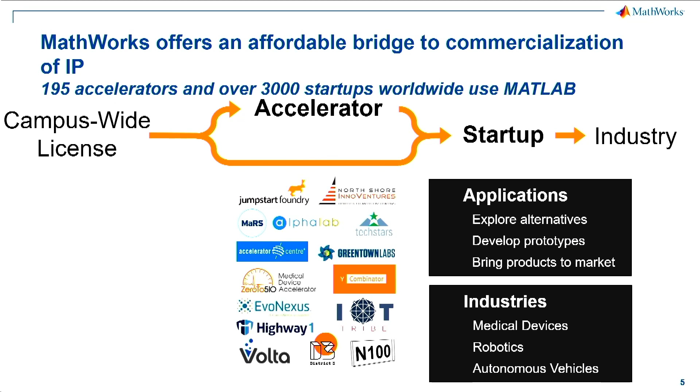I will just run through these slides; the main content I will be showing you all later. So, benefits of startups - you all know these, like 1 year free access to Matlab and Simulink you will be getting, more than 90 add-on products. Currently we have 120 toolboxes present in Matlab. Then we have up to 10 licenses per company also. We have technical support - application engineers and senior trainers like me will come to train you all with different tools like Matlab, Simulink, Stateflow, on a particular topic or domain if you have one.

Then, there used to be 50% off earlier, but now we have free additional online self-paced courses, which I'll show you all as well. If anybody is new to Matlab or wants to learn Matlab from the beginning, you don't need to pay for other training centers. You can go with the Matlab website itself.

We have some of the fastest growing companies, like Alphabet, Apple, and others using Matlab software for control design algorithms and more. We have two major products - one is Simulink and one is Matlab. Matlab is for scripting, where you code just as you do in C and C++. Simulink is a visualization, model-based algorithm development tool where you have blocks of different things, which you join, modify, and use. I'll show you one or two demonstrations of how we work in Simulink and Matlab.

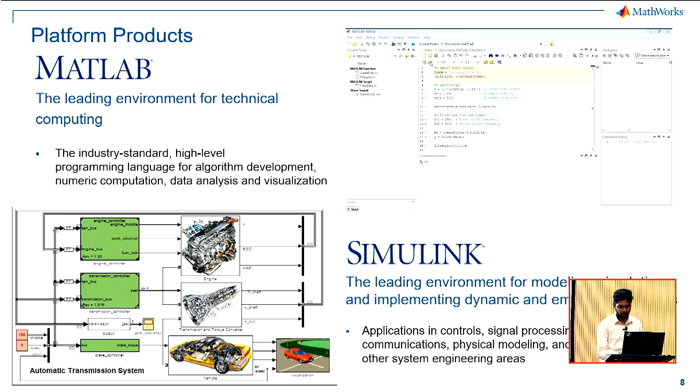Why is a campus-wide license important? When an institution gets a campus-wide license, every student can access it with full resources just by using the college main ID. So it becomes an impact on the whole college. Whenever it's required, they can utilize it, unlike before when they had to approach somebody to get the license for their research and other purposes.

With MATLAB, you can go for learn-to-code or code-to-learn, both alternatively. When it comes to introducing it in the curriculum, we have figured out various areas for implementation. In mathematics, colleges like Kalasalingam University and others have already implemented it, with first and second year students having mathematics laboratories using MATLAB for M1, M2, M3, M4, apart from their academics in laboratory sessions. For electrical, analog electronics and all use MATLAB software. For electronics and communication, we have wireless communication, signal processing, and other things using MATLAB. Robotics also uses it for control algorithms and designs. This is how we trace it for individual departments to add it into their curriculum.

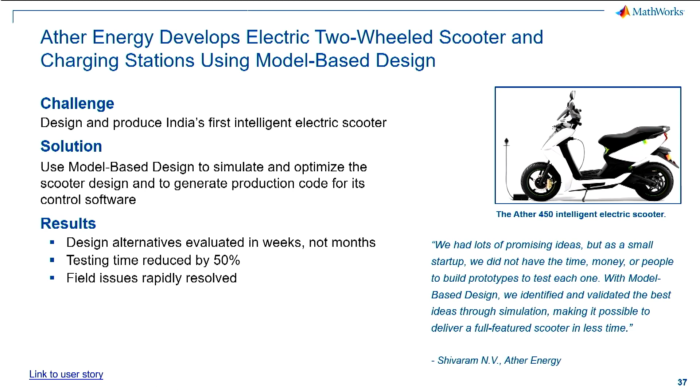Ather is one of the first leading intelligent scooters, which we can say was designed using MATLAB. They got the result too, completely developed and designed using MATLAB.

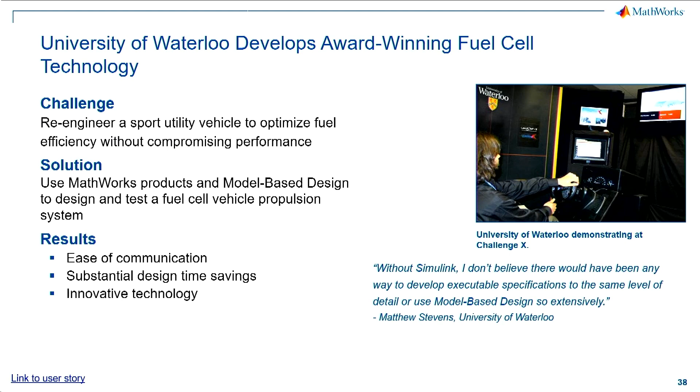Then we have University of Waterloo, who developed a fuel cell based electric vehicle. It is a leading project nowadays in electrical engineering or electric vehicles domain, we can say. They developed it already and tested everything using MATLAB.

So you can see where the software is right now, and you all have the opportunity to start learning using the pre-requisite courses we have, self-paced courses, free using your college domain mail IDs. Start it, learn it, and you can also be placed as a scientist in ISRO too. So this is all about MATLAB - these are the small slides I had.

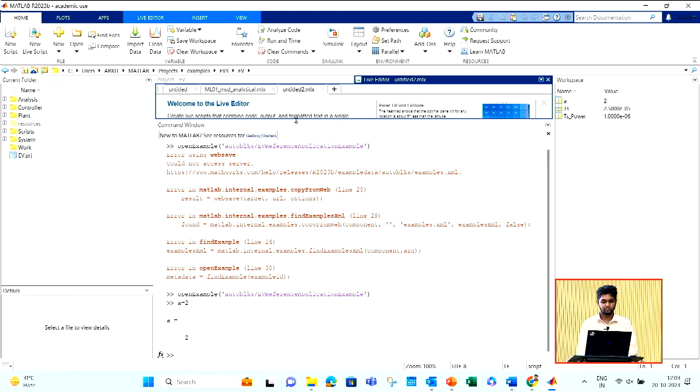Then an additional thing we have is new live script. Everything whatever you do will be printed on the right hand side then and there once you run it. No need to type, compile everything and then get to know the answer. At one particular point, if you want to know the solution or what values or output you are getting, you can know it then and there like this.

So if I run it, on the right hand side it will print me the values. Let me zoom it in, okay.

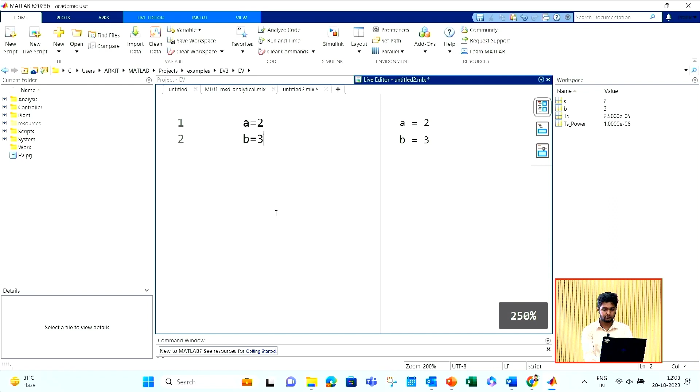So now, initially I said it was matrix laboratory, right? So can anybody tell me, have you all used C, C++, Python before? So how do you all do matrix operations in that? How do you all assign a matrix? Anybody can please answer me? Or let's take very simple C, C++, everybody has done in engineering. So how do you assign a matrix in that?

Using arrays and all, right? So let me show you how we do it in Matlab. This is that simple in Matlab.

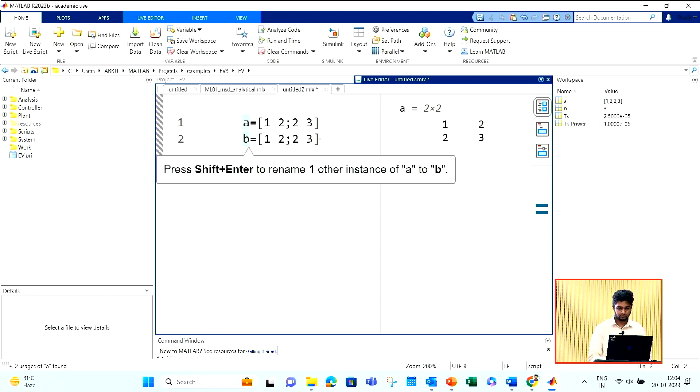Addition of matrix. This is addition of matrix.

Multiplication. This is multiplication of matrix. This is that simple in Matlab compared to other programming languages and all. Everything is direct. No need to go for header files, this, that and all. Assign your int, char, double and all, float and all. Just directly you can type and get the values here. So let's take it a bit to the next level.

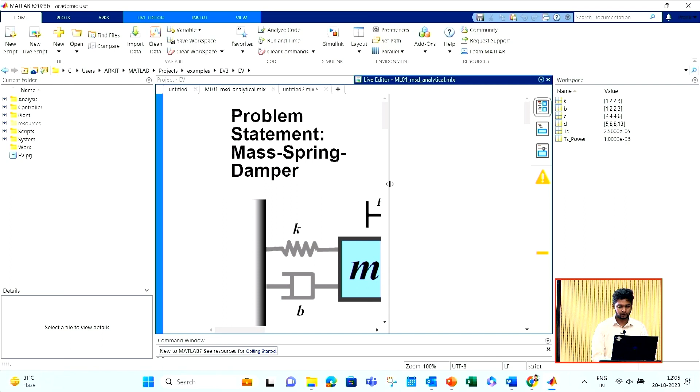So I have this problem of mass spring damper. I guess many people will be knowing it.

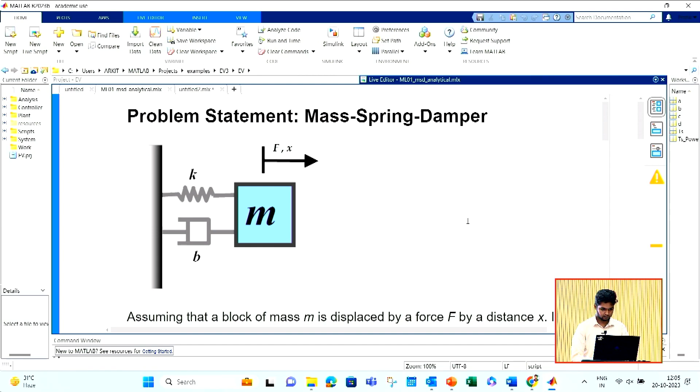A spring coefficient, a mass attached to a rigid body. When you hit that, the mass vibrates, and after some time the oscillation comes to a stable position. So we have to recreate it in Matlab.

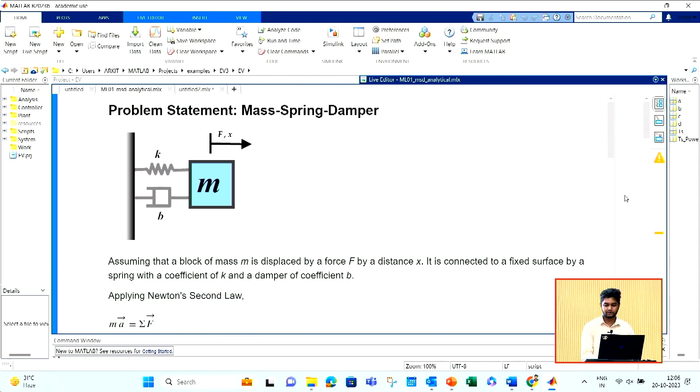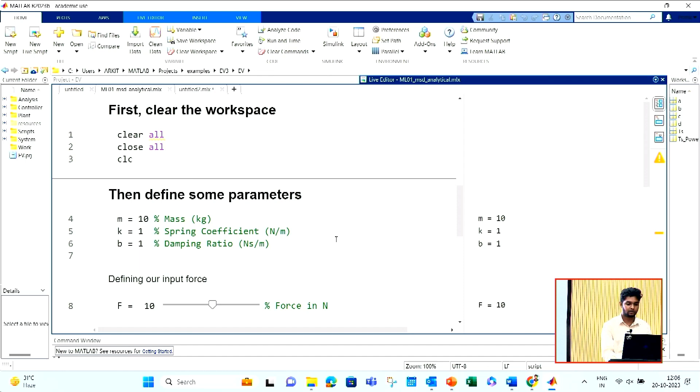Let me go for the scripting way, how we code it in Matlab. We have clear all, close all to clear previous workspace variables. Then we define M, K, B - the spring constant block and the mass block - then the force applied on that. We get these sliders here.

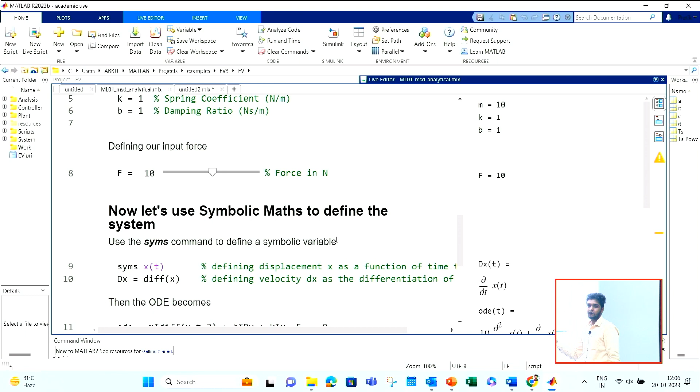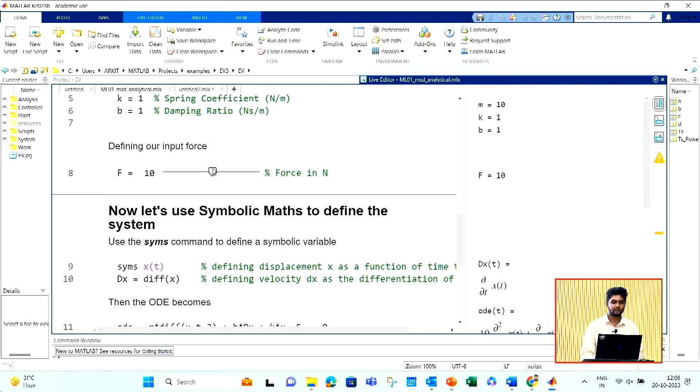What we do usually while compiling another programming language, we go change every value and recompile it. Here that is not the case - you can use this drop down or scrolling sliders just to change the value. If you change the value, it will change for the entire compilation. So let me keep it 10.

Then we have syms, a function for symbolic mathematics. Then we have ordinary - it is a second order differential equation. This is basically the equation for which we are going to solve.

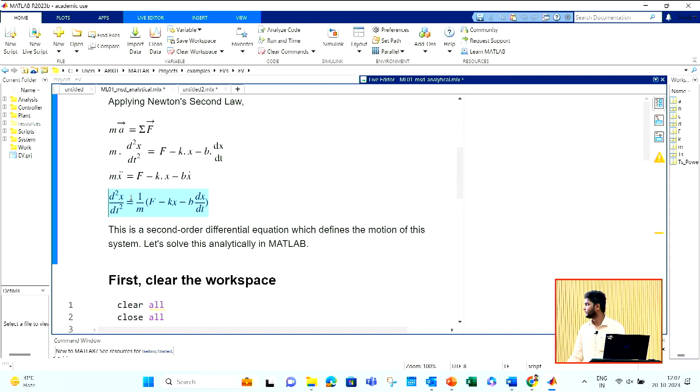So 1 by m, f minus kx minus b into dx by dt. Then we have our boundary conditions, x of 0, dx of 0 and all. Then solution of ODE and conditions together, we get y solutions, a function which will compile.

So here in the 16th to 20th line we mention what type of graph we want - Ti of 0, 0.1, starting right from 0, each time interval of 0.1 till 100. Then we have the plot function wherein you plot that graph of Ti and y solution. Then grid on - grid is nothing but the lines present in the graph, I will zoom it so you can see it. Then I can label my x axis and y axis.

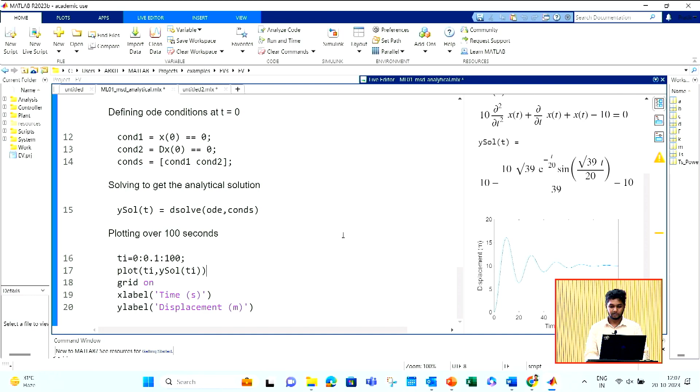Once I solve it using values like m equals 10, k equals 1, b equals 1, I have kept the force as 10, implementing that in the equation mentioned here - this is the differential equation we saw above. In other programming languages, every time you have to assign what is dx, what is k, what is x, and if it is decimal, again you have to go for another variable type like double, char, float. Here that is not required.

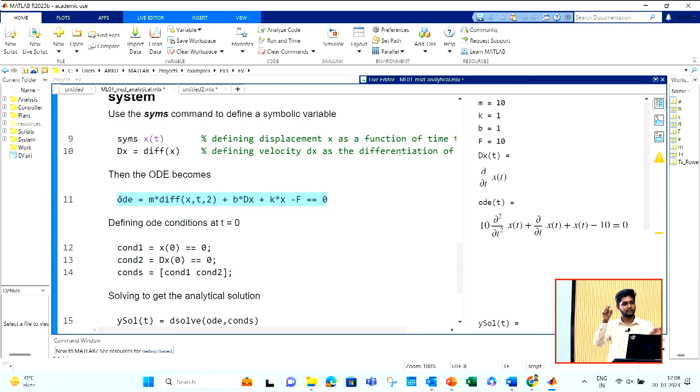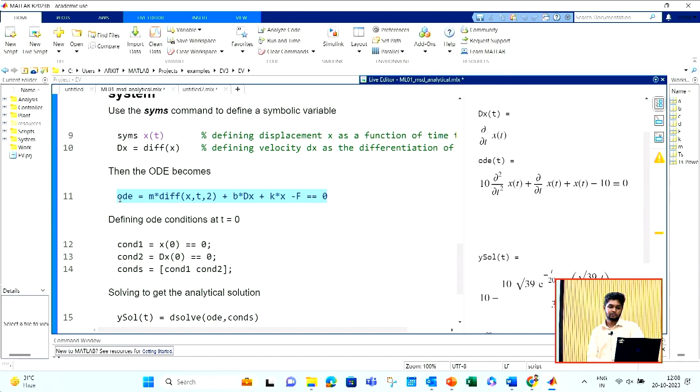You can just directly assign a variable ODE and write the whole equation, directly assigning the values for individual variables whatever you have. On the right hand side you can see how it is printed. So the same thing, we have the solution we got here, and at the end we get this graph.

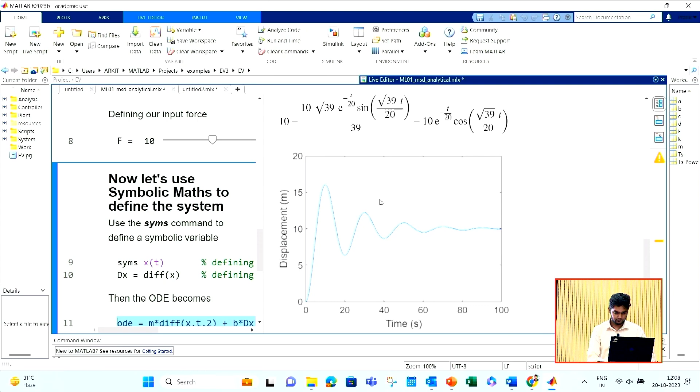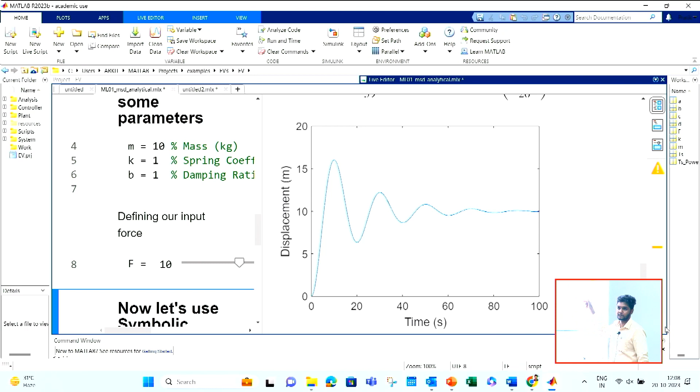A damper graph which you can see, after some certain time it gets stabilized. So this is how you solve mathematical equations, differentiations, derivatives and all - you can solve algorithms using Matlab. Very simple, user friendly kind of approach you have in this.

So let me take it to the next level - I want to solve it in a simulation. This is how it looks in simulation manner, the same thing you saw in the scripting way. There is a second order derivative, so I have two integrator blocks, then one addition and subtraction block here, a summer block as we call it, then we have certain gain blocks. Let me explain a bit, it will take 2 minutes.

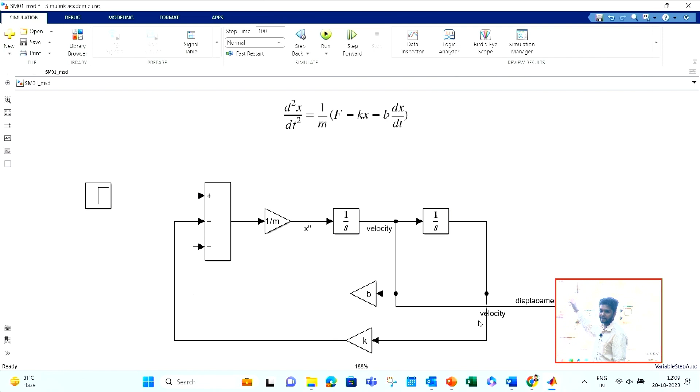First integration, then second integration, so second order derivative will get out. Then we have b - after one integration we get x double dash, x dash, and after the second integration we get basically x. So what we have is b into x dash, that is b into dx by dt. Here we have x dash, that is nothing but dx by dt, so we multiply it into b using a gain block, same as we have kx - k into x will be multiplying here.

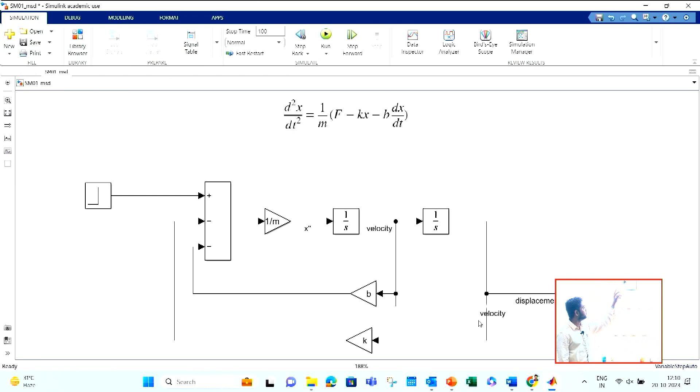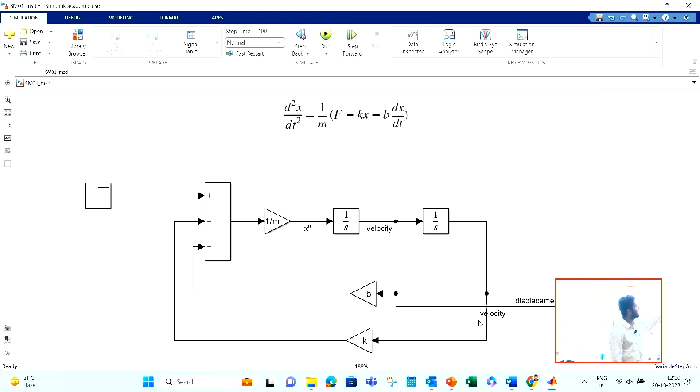At the end, what we have to do is 1 by m - it's added with force. So now we have the whole equation, minus, plus and all those things. F is taken as a step signal input here, using a summer block. F is plus, then again you have minus kx - we have the k block added to the minus, then minus b into dx by dt, which you also take as minus. The whole equation is multiplied into 1 by m using a 1 by m block, then it is given back to the second order derivative as it was equated.

So now basically we will be getting two types of output here - one is velocity and one is displacement of the spring damper. Let me show you.

I should get errors. Oh, nice.

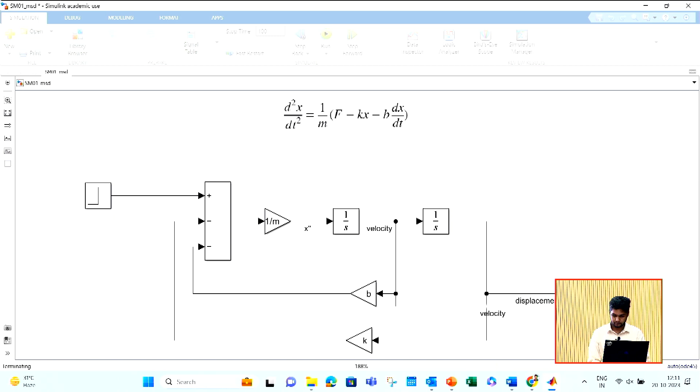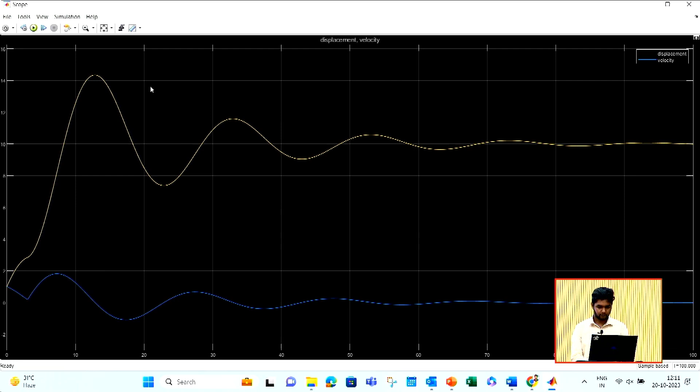So this is how you get it in the Simulink block. This is not the only thing, you can change the graphical approach also. You can change the colors as per your requirements, as you cannot put this in a journal paper with a black background, right?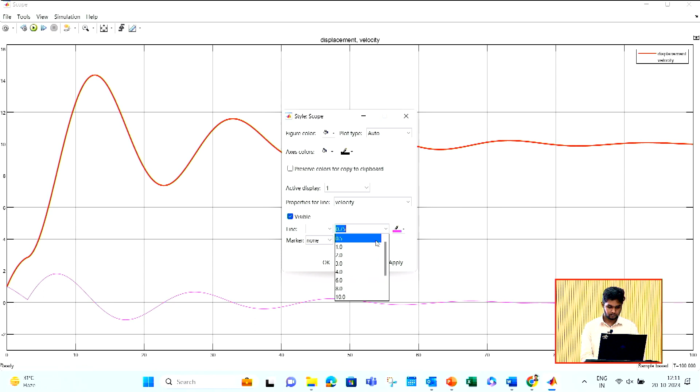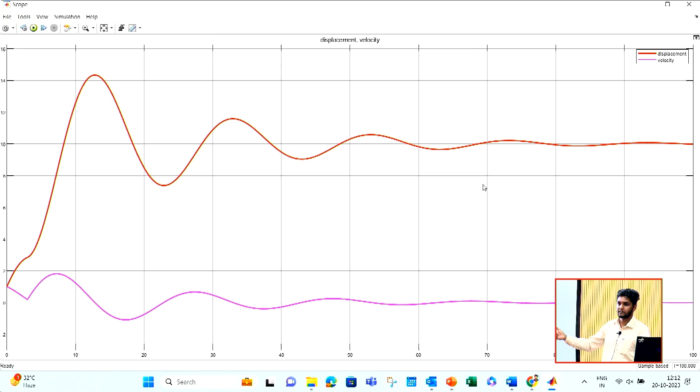This is how user friendly Matlab is. So for having these labels on the right hand side, displacement and velocity, you need not modify everything. You can just go here, and for those lines you are getting there, you can add labels as velocity and displacement. It will indirectly tell you which color graph is indicating what parameter. Like say we have red as displacement, pink as velocity, it will mention that in the graph itself.

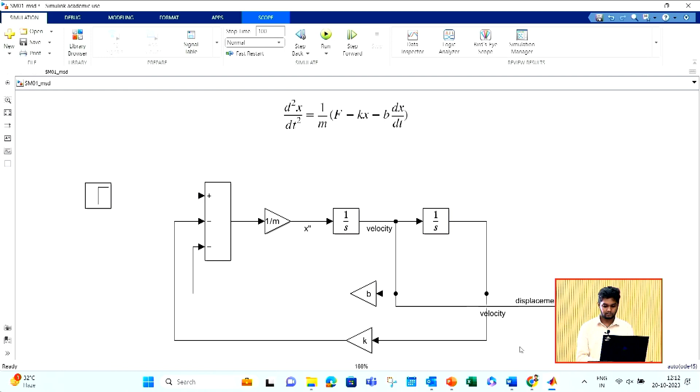So this is how you solve a differential equation using Simulink in Matlab. This was very simple, right? So let's take it to another level.

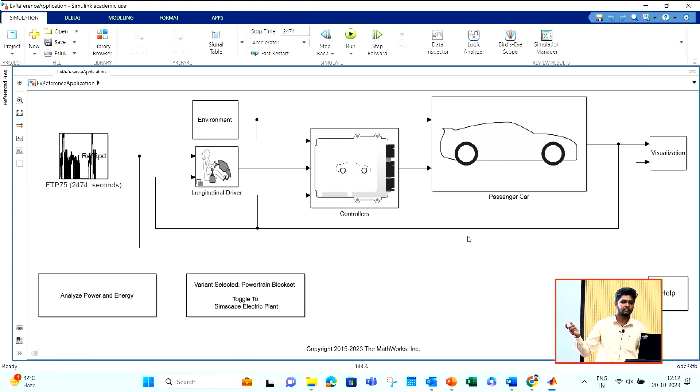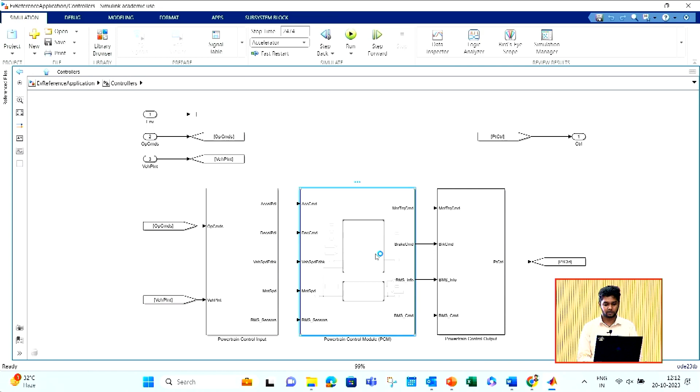So this is a full model of electrical vehicles. You can see we have the drive cycle, the longitudinal driver, controllers, passenger cars, visualization, everything in this. These basically contain sub blocks, the powertrain control module and all, which contains the inverter control or your battery management system. The battery management system again contains the battery pack. Here you have the battery pack, the BMS control, battery balancing logics. These things are already included.

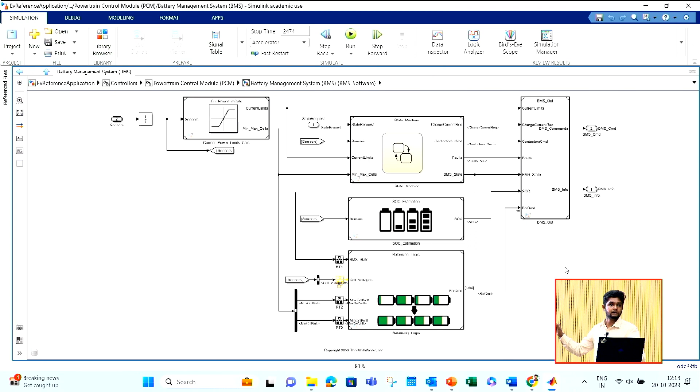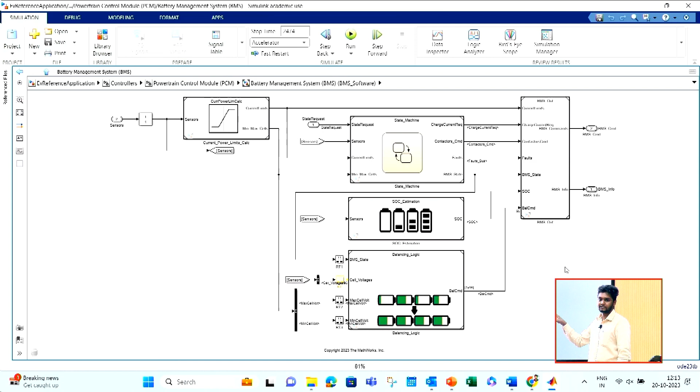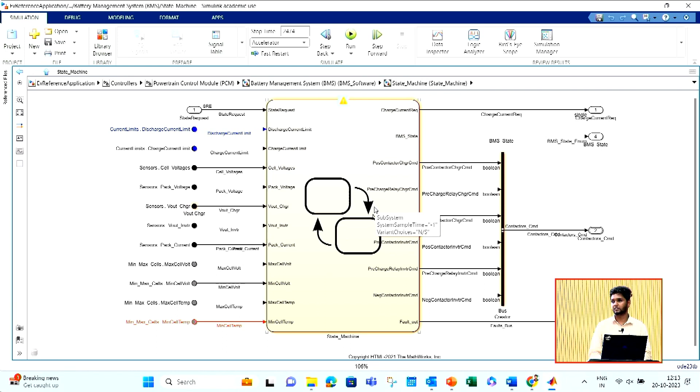Yeah sure, I'll come to that. So you have all these elements, you can just use them. These are again sub blocks actually. If you go inside, all the elements are already created in this. This is the research work happening at say Mercedes, your Tesla - those people use Matlab at this level, in which you have sub blocks with different elements, each and every parameter is included, nothing is missed in this.

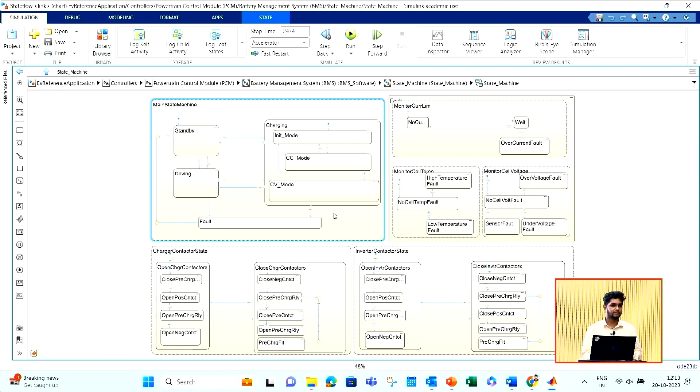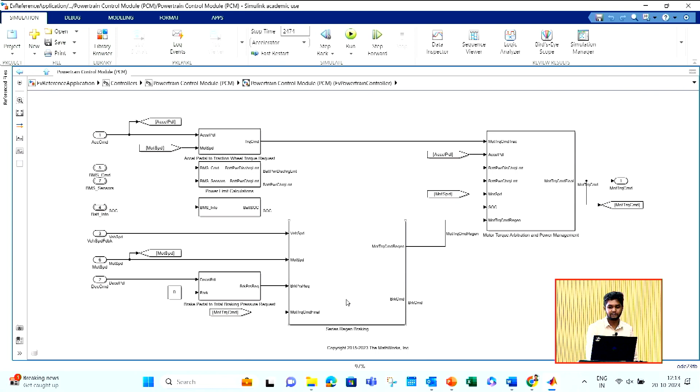So if you want to go for a powertrain model, this is the powertrain control module. You have series regenerative braking also included in this. Then you have motor torque control and power management system also in this.

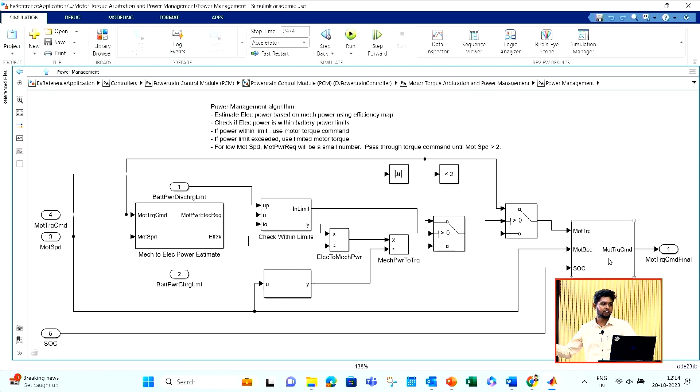So you have mechanical power, the torque limiter, the maximum torque where you want to limit it - those things are already included. This is a simulation based approach where you get an idea after designing, where you can have lots of trial and error methods without having any loss. That is where we use Matlab or simulation or Simulink.

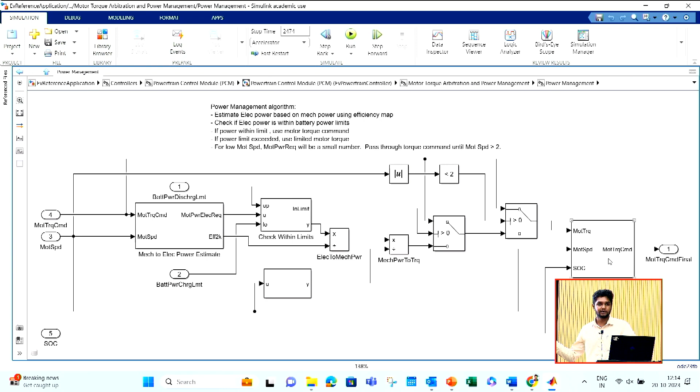When you go directly for prototyping or hardware implementation of these elements, every time until you get your expected or desired solution, you will go on changing all the parameters or every element. But simulation makes it easy. Until you get the desired output, you can change it, modify it however you want, as many times as you want. Once you get that, you can proceed for hardware implementation, just replicating this.

Even we have hardware integration directly with Matlab - this is new for you, I guess. You can integrate Arduino, Raspberry Pi, dSPACE, Xilinx. You can use your Python code, C++ code, everything in Matlab directly. We have the Matlab Coder app or toolbox which will convert those Python codes, C++ codes to Matlab code for direct scripting. You need not use Arduino IDE software, just integrate directly with Matlab. We have a cloud system where you can remotely access it anywhere and monitor it. All these system researches can also be done in this.

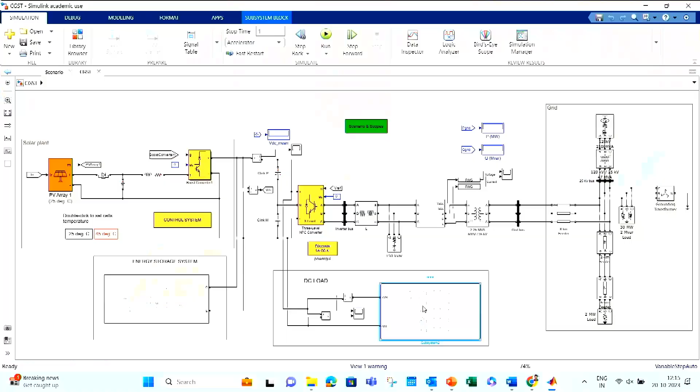So coming to the thing, okay. Another project - electrical vehicle charging station with renewable integration. So this is how we do it, 2 megawatt, you get boost converters, inverter, 3-level inverter blocks ready made in this. I'll show you all things. Then you have your battery models ready in this. You can use them, just drag and drop, and change the values.

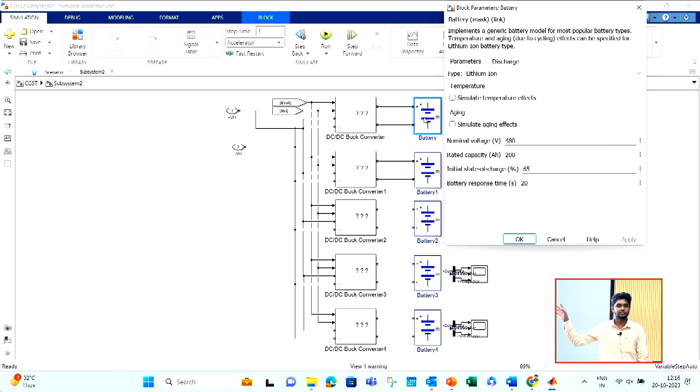Changing the values is also very simple. Just double tap on that. It will give you a box where you have nominal voltage and all - you can directly change the values there. No need to script everything right from scratch here.

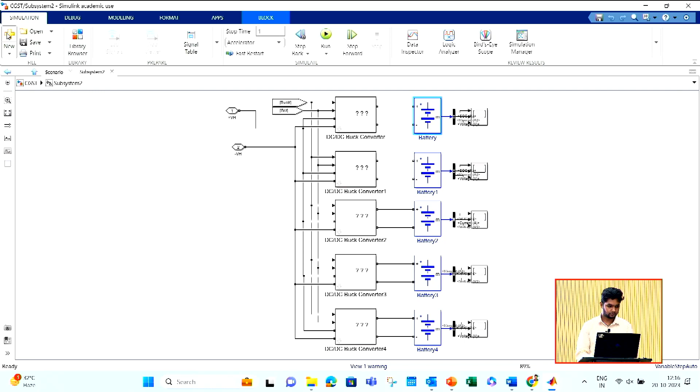So they asked a question, how to drag and drop, right? So when you go into this library browser, this is for Simulink. You have different sets of toolboxes here. Left hand side you can see right from Simulink, aerospace, everything. So say I want something called a resistor - I'll search it.

This is 23B, a fully updated version, so it is taking a bit of time. Yesterday only I updated it.

Okay, so you have your resistor here in Simscape. You can just click on that, drag it, and drop it on the screen.

So this is how you get a resistor block in this. Let me zoom it, I'll add some other things. So you want a diode, you have a diode. Earlier the sir was telling about buck boost converter.

So you have buck converter, if you want buck converter, you will get buck converter in this. If you want inverter, just search, you will get inverters. You have average model inverter, BLDC inverter also.

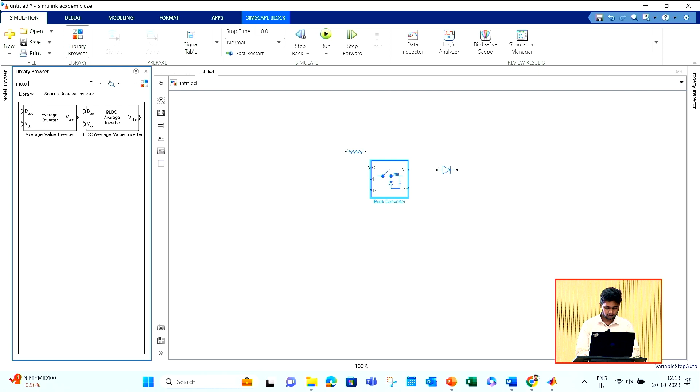Then you want motor, you have different types of motors, controls for motors and all. You want BLDC, you have BLDC motor. If you want induction motor, you have induction motor. Everything is present, you have to just drag and drop, change the values in that.

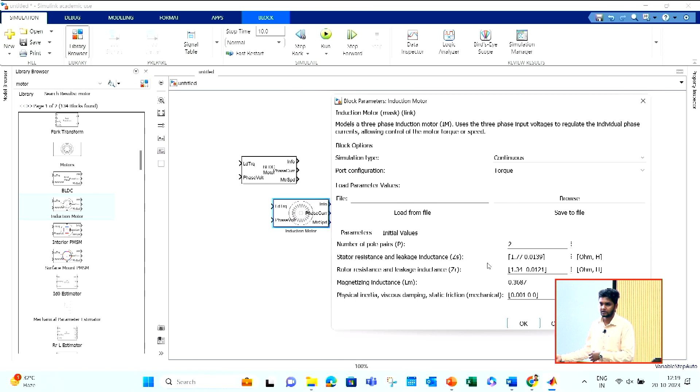Say I have some parameters in this, so you can change all these values here, or you have already developed a motor, use the same thing here and then utilize it for your control algorithms, like motor control drive you want to develop. Those all things also can be done here.

So everything is pre-developed in this, like those blocks in Simulink, and you have to just drag and drop. Only for algorithm development or equation development, you have to go for individual integration block, gain block, summer block. You have PID method, fuzzy logic block also is present in Matlab. You all can use those things.

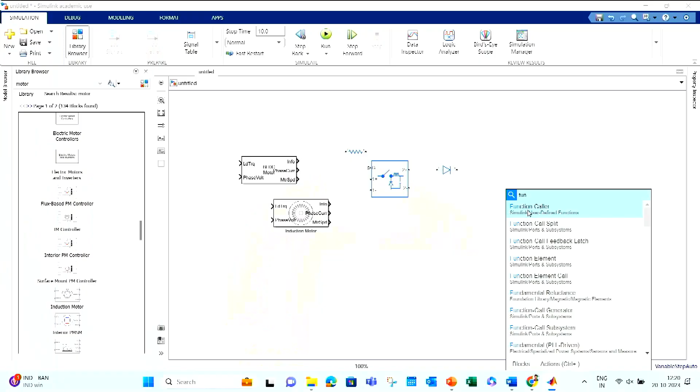And one more thing, something we have, like you don't have that but you want to do it, then we have function block. Not this.

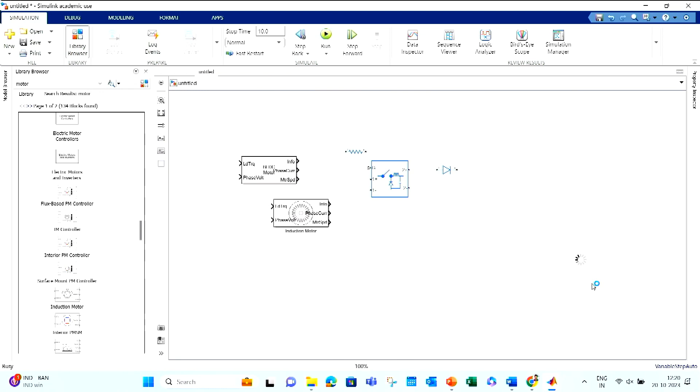So this is Matlab function block. If you open this, it will take you to the Matlab screen where you can script it. So number of inputs, outputs you can generate here, and you can come back again to your simulation block where you have, okay, and just drag and connect them.

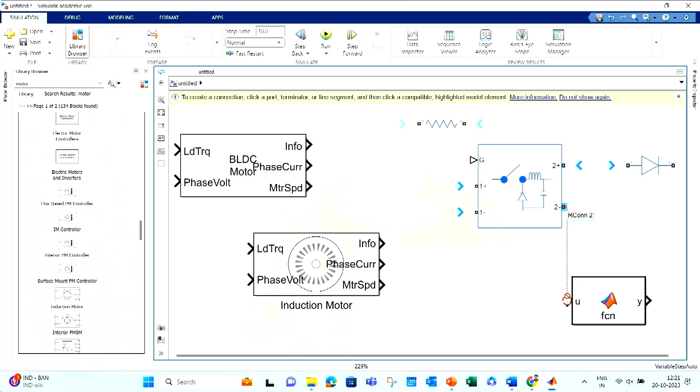Okay, so it is a SimScape block. You have to just drag and connect them like this. So on the input side, this is how simply you can have the connection here.

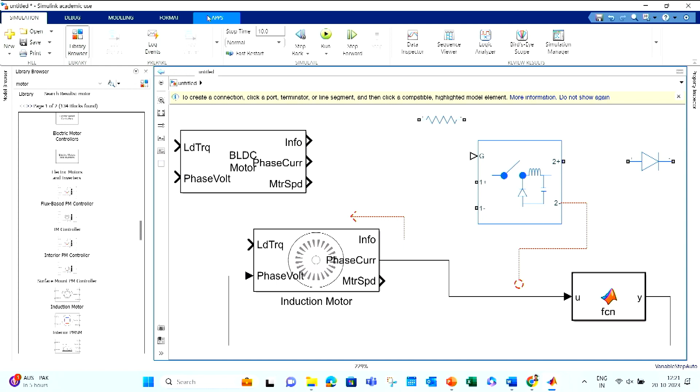You can do it, so this is all about Simulink, how you can use it. I showed you all Matlab. Then additionally, we have something called as these apps in Matlab.

We have more than 100 apps here. So you all can use right from model analyzer. Like if you have 3 different models of Simulink, say you have done with different controllers - PLL, HCC and other controllers - and you want to integrate all the graphs and compare them, you can use the data inspector here, which will help you take all the 3 different simulation graph outputs in one, where you can compare those 3 different simulation outputs also.

Then you have your control system and all this. Okay, let me open one.

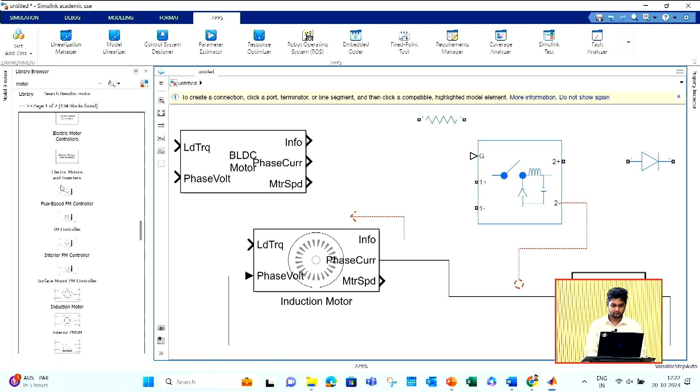So this is the code generation, this one which I am indicating. These are the code generation applications where you can convert from other elements to this, like embedded coder or other things like C, C++, Python, and all can be converted to Matlab scripting.

Okay, I guess I am running out of time. Yeah.

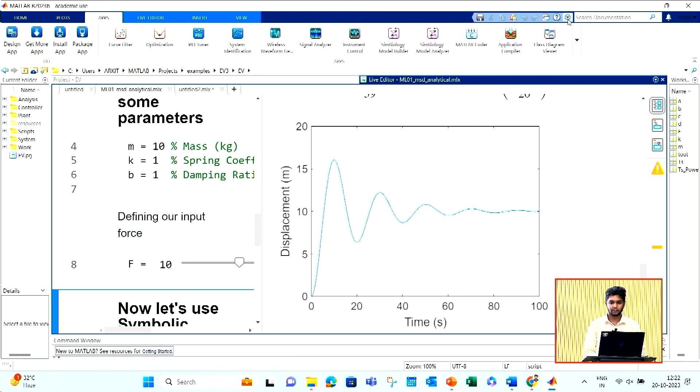For mathematics, we have curve fitting and other apps also here.

So this is all about Matlab. So anybody has any questions? Anything regarding Matlab, please let me know.

Thank you, yeah. So it was a good basic presentation. You feed the dataset, is it an Excel sheet which you are saying for? No, huge amount of dataset.

Can you implement it? Yeah, you can. For that, you can take the image processing onramp, in which they have shown how to have that Excel sheet in your scripting part. So you can extract it from there, and then at the end you will be getting it in the workspace variable.

Sorry, your right hand side. So once the Excel sheet is extracted, say this TS, if I double tap, you can see the table view here. So all your values of x axis and y axis will be stored here. So all the large datasets you have, it's unlimited, you can just scroll down to thousands, 2000s and all.

Any other questions? Anything related to Matlab?